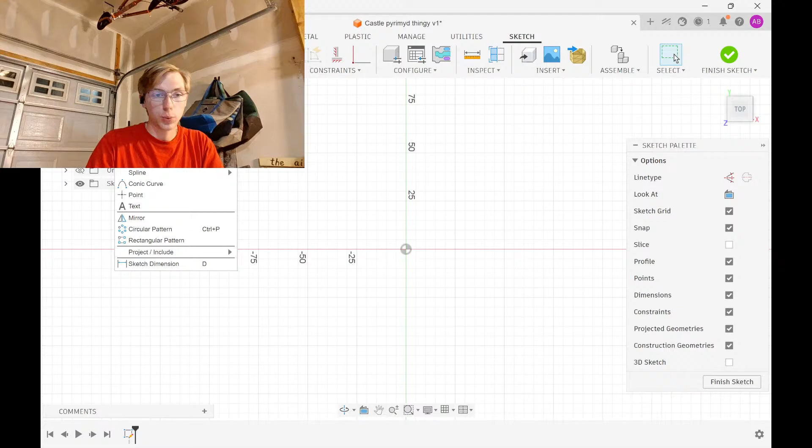So let us go back into Fusion. We have a blank slate, and the first thing I'm going to do is make the triangle shape like this, just a simple triangle, and all these angles are going to be the same, which means, if I can remember math, for an equilateral triangle all the internal angles are 60 degrees. Then we will make this horizontal and set the side length. That's not an over-constrained sketch, my guy. Oh. Is it? Oh, I did the wrong one. Okay.

Then we can use some construction geometry. You can see this, correct? Yeah, great. Just had to make sure real quick. Construction geometry to find the center point right there. Now go up to the top. That's construction. Then we will add another line of construction geometry along this axis at the center to there.

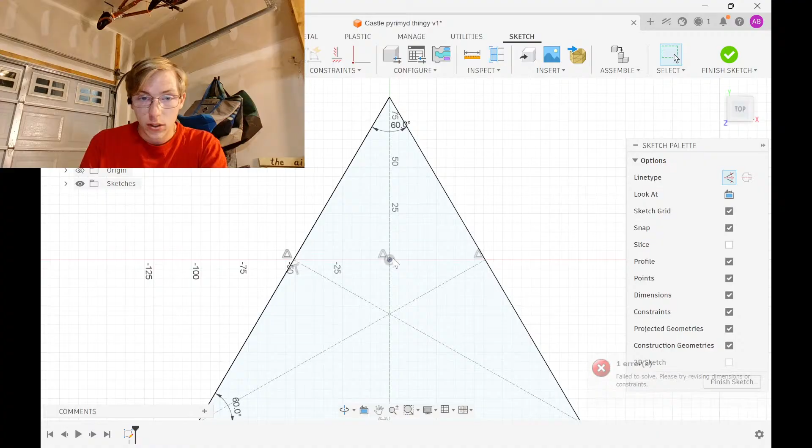And I messed it up. So, coincidence, this point to here. And then finally, one third line of construction geometry right there. Now this point right here, we can constrain, actually we will do midpoint, this line right here, and then this line right there. Oh, I midpointed that line, my bad. We want to coincidence this line here, coincidence this line here, and bam, now the circle is centered.

And we can, that's our bottom, right? So we can extrude this to be 2 millimeters. And that's our bottom plate. Then we want a hole in it. Circle, go back to the web, and go to rocketery.com. We go to their component section, we go motor mount tubes, and we want their 29 millimeter 6-inch tubes.

Of course, it doesn't actually give me the dimension. Quite annoying. Apogee. Apogee will give me the exact dimensions. So, the 29 millimeter motor mount tubes from Rock Precision. I think these are the ones from Rock Precision. Manufactured by Apogee. Okay, we can always change the dimensions later. Again, this is just a test. But the inner diameter is going to be 29 millimeters, and the outer diameter is going to be 30.7 millimeters.

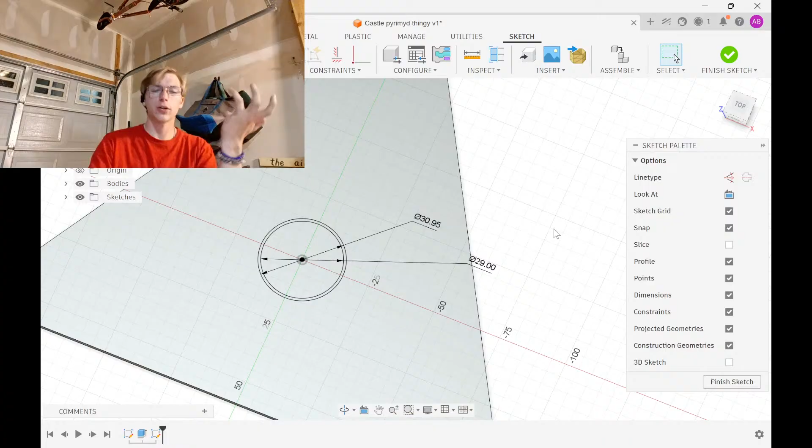And the reason I do equations is so that later I can go back and change this number if I get a different tube or something, and then the tolerance will still be there instead of me having to calculate what the new number should be each time. Now I can, bada bing, bada boom, extrude this -2, and we have ourselves a hole. And then I can... I'm not thinking ahead.

Okay, so when you do laser cutting, you have to use a DXF file. You export a DXF file, and then you import a DXF file into the laser cutter app. What I just did is I made a solid, but that solid has 2 DXFs because DXFs are made from sketches. So what I really need to do is make the whole plate in one sketch. So I'm gonna go back into this sketch, and I'm gonna make those same two circles, but I'm gonna make sure they're in the same sketch.

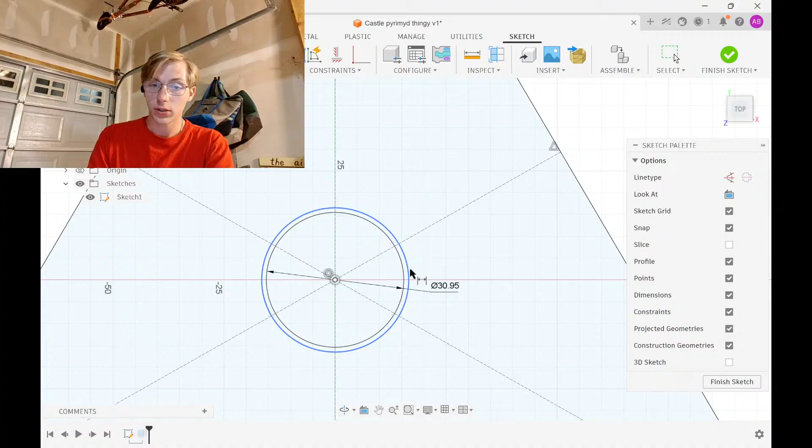So this was gonna be 30.7 plus 0.25 millimeters, right? And then this one was just straight up 29 mil. So now I can go back in here and I can deselect these two, and then we have the same shape, but now it's one DXF file. So I can just go in here, right click this, export as DXF, and then we'll have what we need to laser cut.

Let me read the chat real quick. I would make it taller, except that I haven't simmed anything taller, and I already know this flies straight, so I'm going to stick with something that flies right. At least something that is supposedly flying straight.

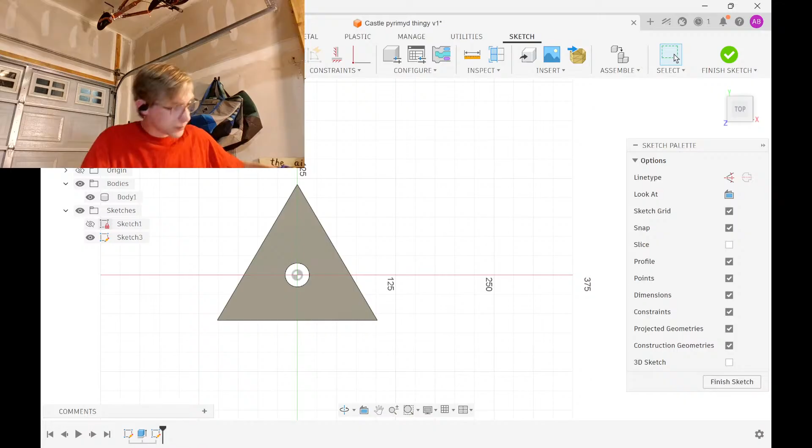A square that is 6 by 6. No, it's not a square that's 6 by 6. Wait. Yeah. Alright, so we'll start with a... That is not the right button. Cancel. We'll start with a square that is 6 inches by 6 inches. And then we will center it.

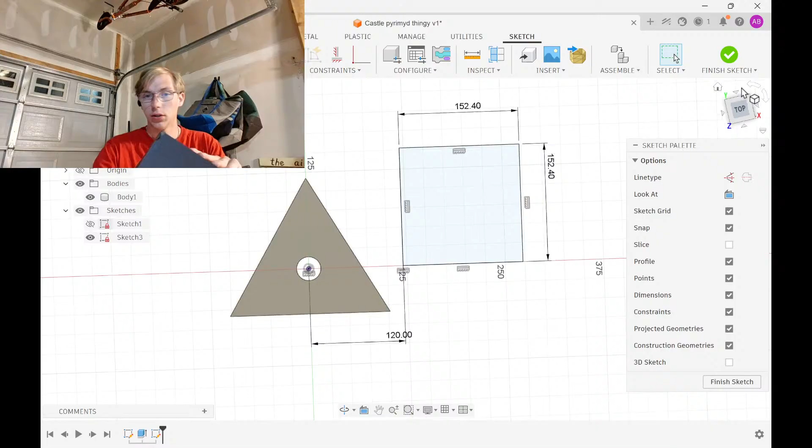Actually, bada boom, and then do 120, just so it's close. Now, the pattern is on one side, so if you turn it horizontally... that didn't. But if we turn it horizontally, it appears as though it goes out at the top to the point, and then it goes in by 1.2 inches, but for clarity's sake, we'll just go with 1 inch.

So I'm just gonna model up the shape real quick. How many cutouts is there? There is 1, 2, 3 and a half. Okay. Need to coincide that there. Then all of these, actually, we'll just use a line of construction geometry. This is construction geometry. This needs to be horizontal, and it needs to be 1 inch away from this. Now we can coincide all of these points onto the line.

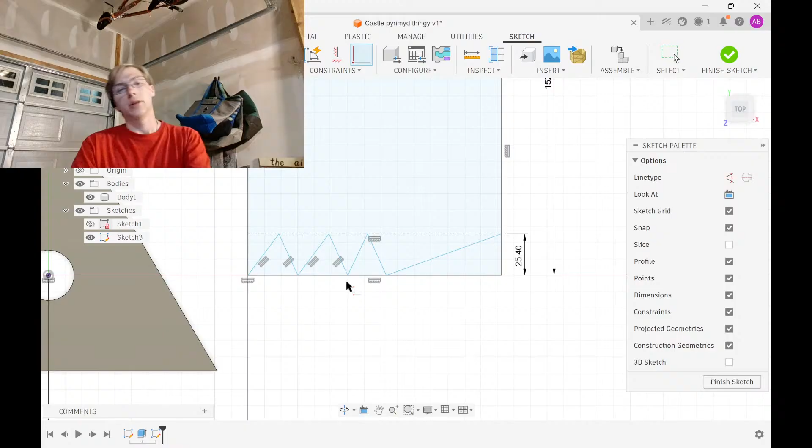That actually goes there. Now we have to make them all equally spaced, so we take 6 inches and we want 1, 2, 3 and a half cutouts. So my brain is not mathing, but it should look something similar to that. If we want 1, 2, 3 full cutouts and a half. I don't know why they have that half in there. I assume it's for a reason, but

we need obviously 3 divided by 2. 6 divided by 3 is 2, or 6 divided by 2 is 3. 6 divided by 3 is 2. They're all correct. I'm just rambling on.

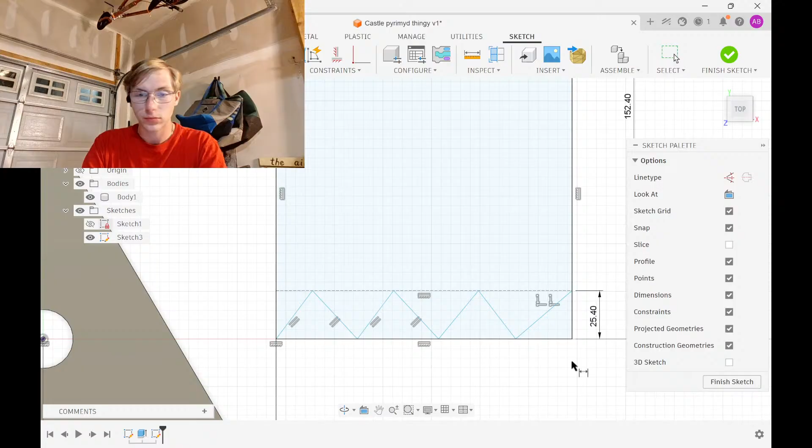You can see that this diamond is the same shape as these 3. So these are 3 full diamonds and a half diamond. Which means if we do a dimension here and here, dimension between here and here, do this as 1 inch. This is 1 inch. Here and here is 1 inch. Here and here is 1 inch. Here.

No. Those should not be parallel. Those should not be parallel. Dimension, 1 inch. Dimension between, 1 inch. Nope, that's not correct. So let's go 0.8 inch. Honestly, I'm just gonna eyeball it. 0.8 inch. Copy that.

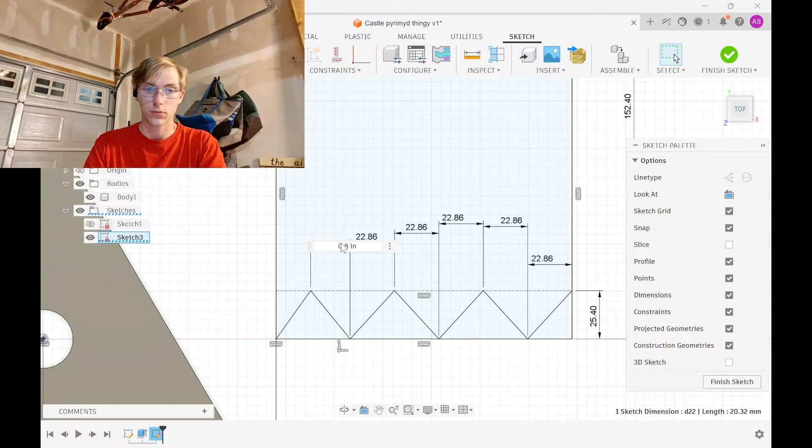That doesn't look bad, but I'm not convinced that looks proper. So let's go 0.9 inches and try 0.9 just as a nice middle ground. That's a bit too much. So we will try 0.85.

Alright, that looks about right, I think. Yeah, that looks about proper. So now we can go and just extrude this as 2 millimeters, and we've got that edge. Now I'd say we should probably break this open because we have one. So let's go ahead and crack it and decipher the insides.

Let me read chat real quick.

Alright, so first I'm just going to try to rip it open. Actually, I have a razor blade. So it appears as though it's almost... No, they waxed it. Okay. So they glued it. I don't know. The only thing I don't know is how they hold up these. I'm trying to think through how you build it, and logic states that it wouldn't really be very structurally sound, you know? Like, when you're building it, I feel like this would be very difficult to build. Which isn't necessarily a bad thing, but... Oh, what have I done? I'm just not cutting it out of the way.

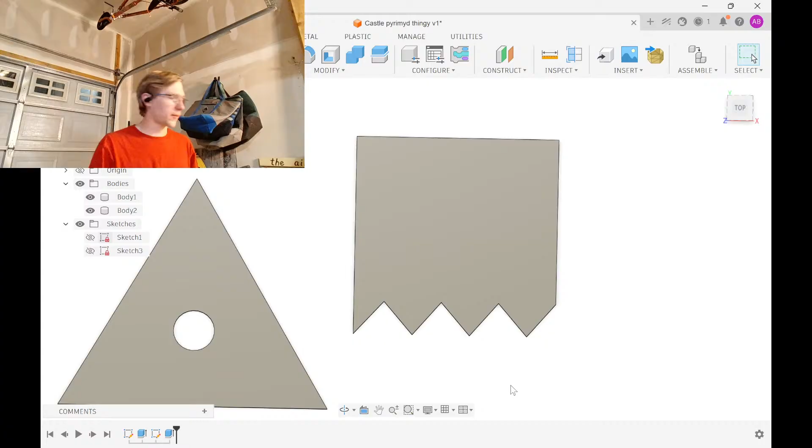Well, if you want it, like I said, it'll probably be... This one should honestly be really easy to test fly. Because once I laser cut it tonight, honestly, for a single-use rocket, I could just 3D print a motor tube and then build it, fly it in the next few days, and then launch the kit. Probably sometime by the end of the week, ideally.

24-hour kit build, meaning I have 24 hours from a half hour ago to fully design and launch a kit. That would be interesting, to say the least.

I've thought about using tabs, because I could theoretically use tabs on the sides to help hold it in place, but I feel like that would almost disturb the look of the rocket, you know? I don't know. But yeah, let's finish. So we've got this one. I think I will probably have to use 3D printed launch lugs, because I don't know what else I would use.

What else would I use? Let me know in the chat what else you think I should use. I could get really thin tubes, I guess, but I also just have a 3D printer, and that would be much faster. Cheaper per kit, theoretically. So let me know if you guys think it would be okay to use just a 3D printed launch lug, because I think that would actually work really well.

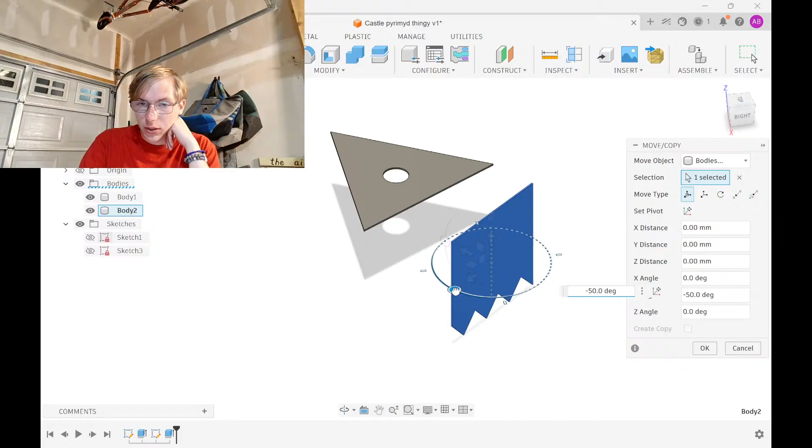So I have to figure out how I'm going to model the side with the hole. I guess we try to assemble this, so we'll move this, and what it's going to have to do is we'll have to turn it 90 degrees this way, rotate it 60 degrees this way. Actually, no, 45? No. 55. Oh, 60. Yeah, 60 makes sense, obviously. Silly me. And then this also needs to be rotated 45 degrees. And then, before I rotate it,

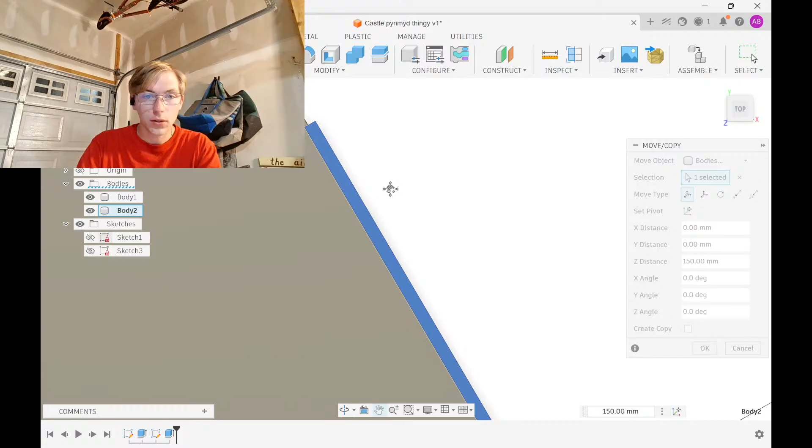well, dagnabbit. Move this. We're going to pop it up 90 degrees, pop it around 60 degrees, and then pop it this. We'll get it in position first. Is that perfect off the gate? No, it's not. Okay. We'll move it back a bit. 0.5. 0.4? No. 190. No. 150.

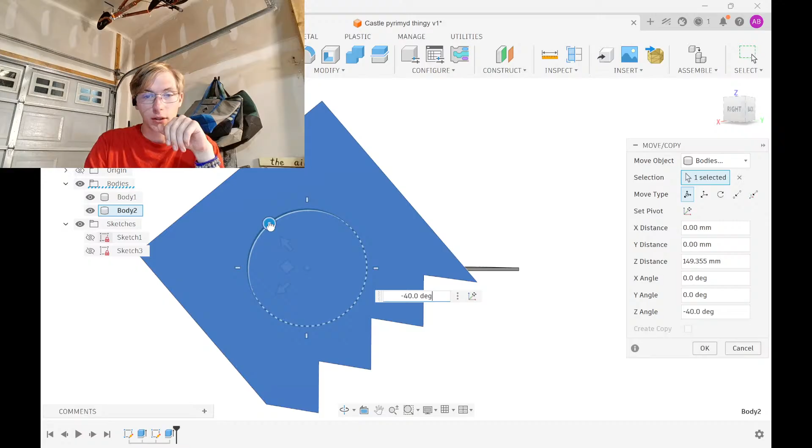It was 149. No, 0.35. Okay, perfect number. 149.355. Okay, now we will rotate it 45 degrees and move it. Now it's good. Now we will move it again with the correct orientation over slightly and then down a bit.

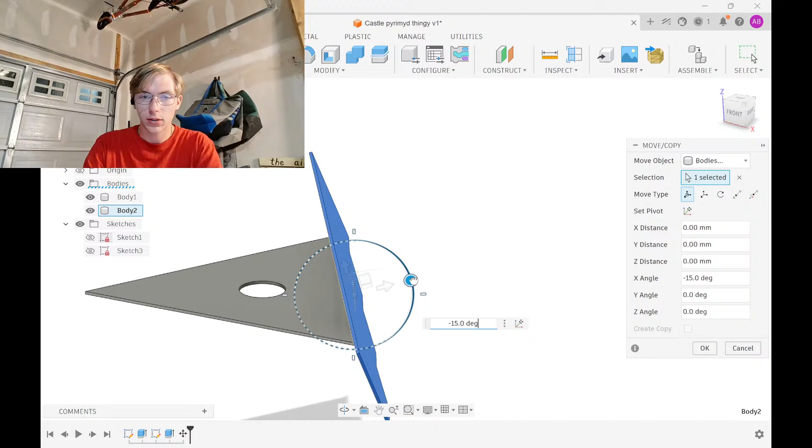Not that much. I don't know how they did this. Like, I know how it's done, obviously, but I don't know how it's done, if that makes any sense at all. No. Because they canted it in slightly. I don't know what degree, though. It is at the perfect halfway mark, so maybe I measured wrong. I guess that's possible.

Is it actually? No. Okay, so the triangle, it's slightly bigger, it appears. Down. Right? Negative. Then we need to move it over slightly. Slightly more. That looks about good. Now I have to figure out how they did the cant.

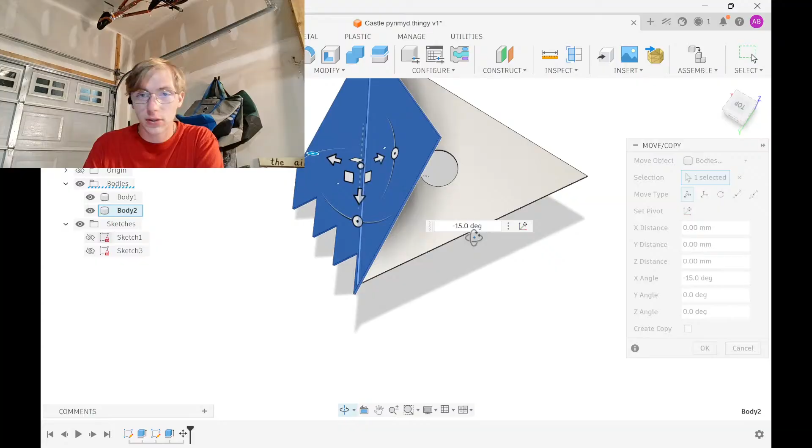The actual tipping inside, because it needs to be tipped in enough that it reaches the center, so that when I copy it around, there's 3, obviously. Okay, I think that's right. So now that needs to be moved out. There we go. Try that. So now when we copy this in a circle around here, we get the shape. Perfect. Absolutely perfect. That is exactly what it's like. Great. Now, like I said, we only need to do the hole.

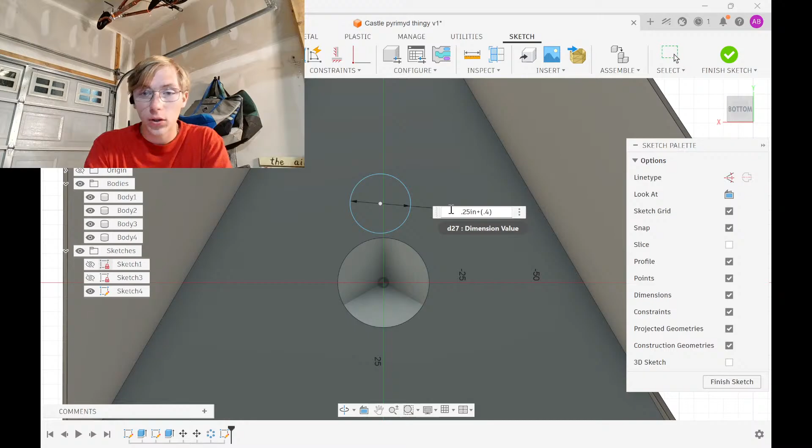How do I model the hole? That's the question now. Because I can cut it through. Obviously, that's easy. If I just go circle, and then I do circle here, get a 1/4 inch hole, so 0.25 inch plus a tolerance. We want this to be really loose, so let's give it a tolerance of 0.4. And then we will center it on this, move it down slightly, so we'll put that 22 millimeters up. And then we can simply just extrude this all the way through it. That's what I need to do, but in another spot, so hold on.

We want this. I forgot they don't let you do negative numbers. That's the only annoying thing about Fusion. Well, actually, the most annoying thing about Fusion is just... Actually, no. Yeah, that's pretty much the only annoying thing about Fusion I can think of. They don't let you use negative numbers in your things.

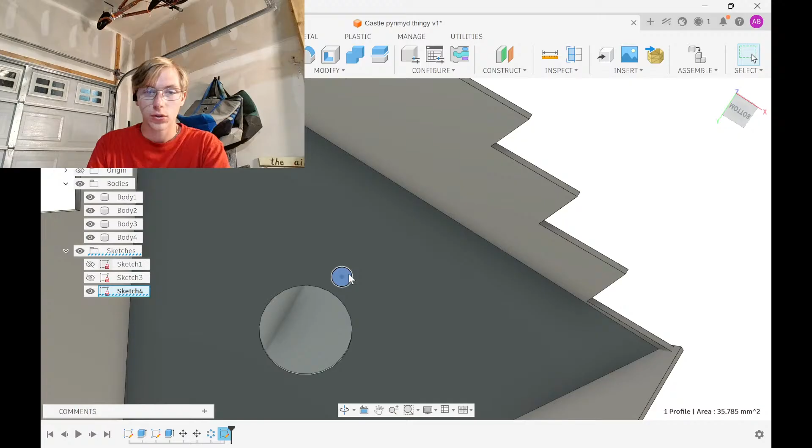Oh. Why is it... ain't doing that. Back on the sketch. Extrude. There we go. Oh, I know what I can do. I can go back into the first sketch and just put the hole right there. With those same dimensions, I can do 0.25 inch plus 0.4 millimeters, and then we can set it to be 22 millimeters above. So that fixes the first sketch. That will make the triangle at the bottom work properly.

But then this, I need this shape. I don't know how I can model this shape flat on the thing because it gets extruded sideways. So unless I can take this sketch, I can take this surface and I can extract a DXF. I guess I could create sketch.

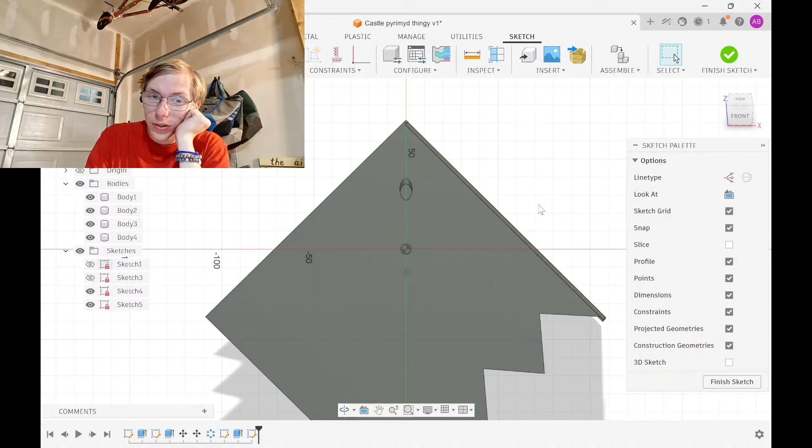No, that wouldn't work, because then the hole wouldn't be this shape. It would be flat. But that's nothing you couldn't fix with sanding. And this is 2 millimeters, so it's already pretty thin enough. So that would work. Yeah, I know. Yeah, definitely. Like I said, I'll probably have it done in just a few days, hopefully, so that it's orderable.

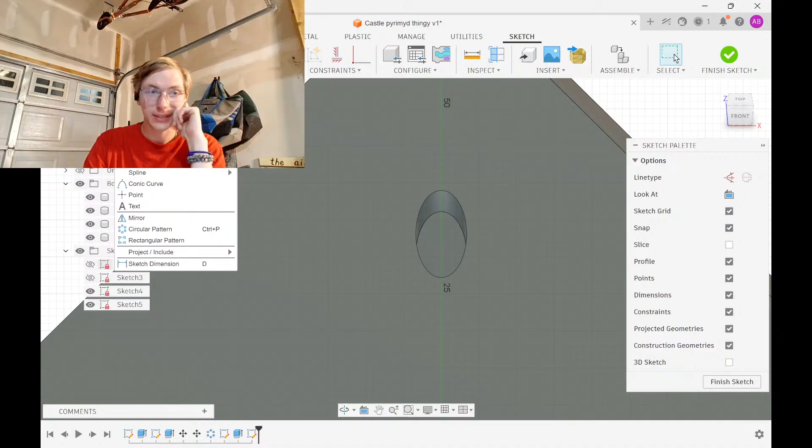I guess I can go back into this sketch. I can probably make an oval that's close enough to this that it won't matter, an ellipse. Circle. Here. There? Yeah, that's the right ellipse. Perfect. So then we just turn off these other bodies so that I can actually get a good model, and then we'll go line here, here, to there, to there, there, there, there.

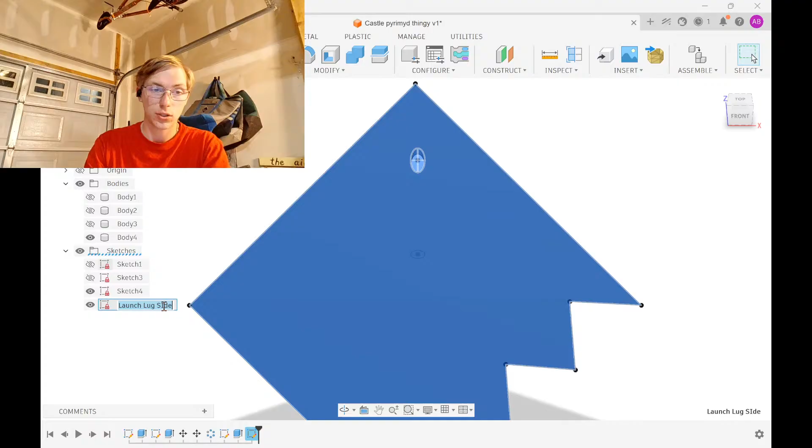We will name this sketch to be the launch lug side sketch. I can spell. Well, I can spell fine, but this one will be the main side, and this will be the base. And then what was this? This was an extra sketch that I don't need. Perfection. Back here. This is actually now in the wrong spot, so I need to go back and coincident that to right there. There we go. Now all of those are defined, and we turn the bodies back on.

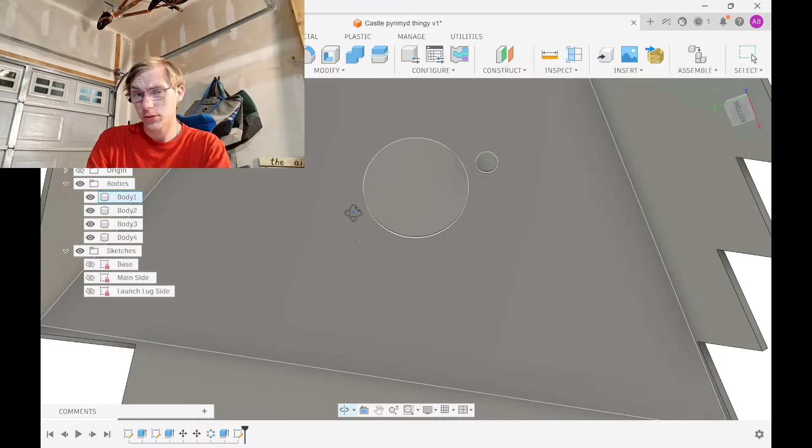We have the shape. Again, we have to figure out the solution to do the ejection part. So what do we think for that? What do we think for the actual, like, ejecting of the motor? Because I don't think it's a good idea to just let all the exhaust gases of this go directly back into here. With this.

So now we turn this rocket into, instead of copying his design, obviously, because I don't want to copy his design, we turn it into something new. So, back to Fusion. Thank you, E.S. Snyder 5. That was useful. I did not know. I've done a ton of searching and I could not figure out who the actual creator of those was. And I remember somebody telling me that he went out of business, but that's good to know that he has files online. So now we just modify it. And I do actually really like the idea of having it have an ejection charge.

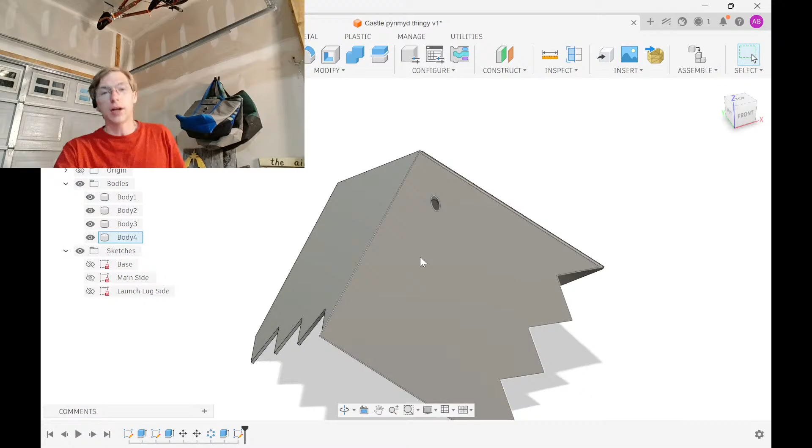Let's see. Let's go back to his website. That's not the right thing. Here. Rocket launcher, rocket clubs. I'm just getting started with 3D, so it's appreciated. Back here. New 3D rockets. Free stuff. What is this? Before going to free stuff, you must read and accept the following conditions of use. Criminal liability. Model rockets are not toys. Yeah. Copyright infringement. Violation launch. Accept. Interesting. Okay. Well, so that means I obviously cannot use his design.

So we change it. I do still want to do a pyramid rocket because I like the idea. So, what shall we turn this into? Does chat have any ideas specifically? Well, I can't directly copy his design because that is copyright infringement. And also, I don't like copying designs. The reason I was trying to make it initially is because I was under the impression that he was out of business and therefore no one could get his kits. Which is true. He doesn't sell them. He doesn't sell the files. He has the files online for his shop. But if you don't have a laser cutter, you still can't make one out of wood. So there's that.

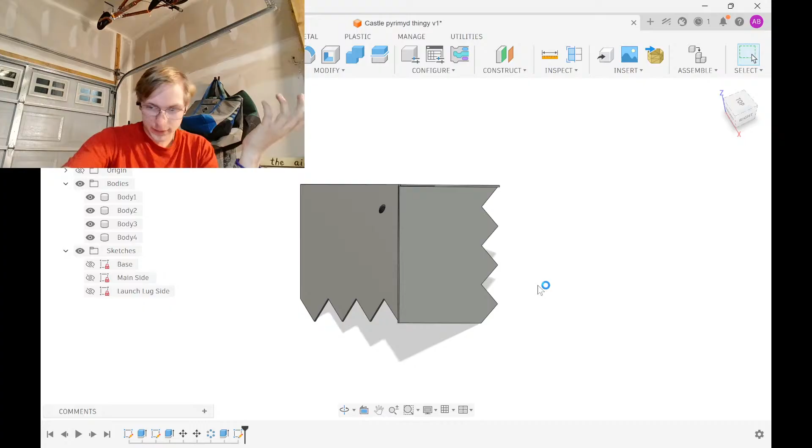But I'm not gonna go and just directly copy his design, so we do need to change it a bit. I think to make it a little more lightweight, and also we want it to be lighter weight because this is going to be made out of wood, so it's going to be a little bit heavier.

And actually, this is small enough. I think if I made it out of wood, I could swap it down to an 18mm engine. And I would like to be able to make this flyable on Estes engines, which means I could go with 24mm. Estes has 24mm E's, right? Am I going insane, or they have 24mm E's, right? Yeah, D's and E's. Okay.

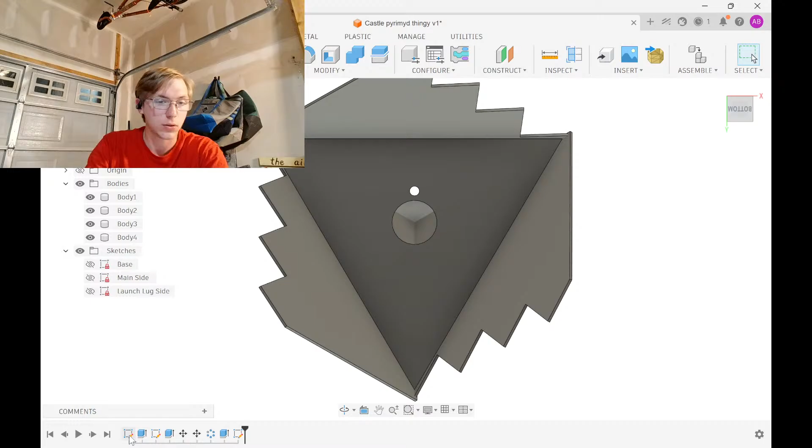So we'll make this down to a 24mm engine mount. Not the right file. This one, yeah. So this will be 24 millimeters, and this one will be 25.7, we'll just call it there. And then this one will be 18 millimeters above. Actually, we'll make it 19.

I've had many people at the club tell me that they would like a rocket like this again because they haven't had one in forever. Because, again, you can either make it yourself, but there's no way to buy the kit. So I definitely want to make something.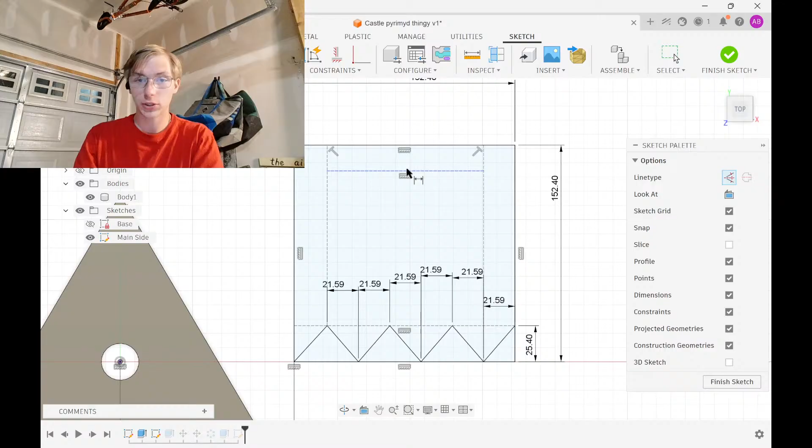And I think let's go with some cutout design, just like continuing the pattern. I don't want to structurally compromise too much, so we'll add some guidelines. Here to here, be off limits. Here to here, and then the same dimension there to there, obviously horizontal, and the dimension of this is 0.85, so dimension this to this. That gives us this square of space to work with.

And I think we should either accentuate the triangle shapes or the square shapes. This is a triangle rocket though, so we should accentuate the triangles. So let's go with triangle in each corner, because why not? I'll define those in a second, so they're better.

And then I need to make them non construction lines. This should be vertical, this one will be vertical, this will be vertical, and this will be vertical, so that we have a right triangle type situation going on. This will be 2 mil from here, this will be 2 mil, this one will be 2 mil, this one will be 2 mil.

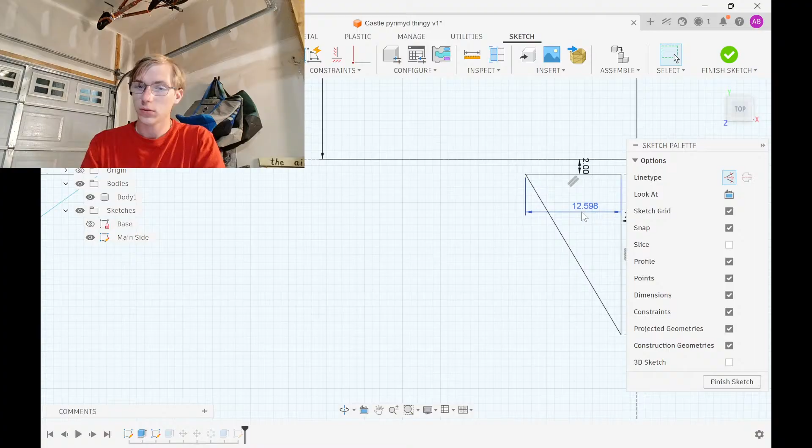And for the width, let's make this 0.85 inch, because that's the same number as the other ones, as the bottom pieces that I made. Dimension this to be that. Yep, dimension this, and dimension that. Okay, that adds 2 triangles. Now we just have to copy and paste.

Over there. Move it right there-ish. And oh, that's not the right button. We want that to be horizontal. And then we will constrain this to be 5, actually yeah, 5 mil is better. It's not 4 degrees, silly computer.

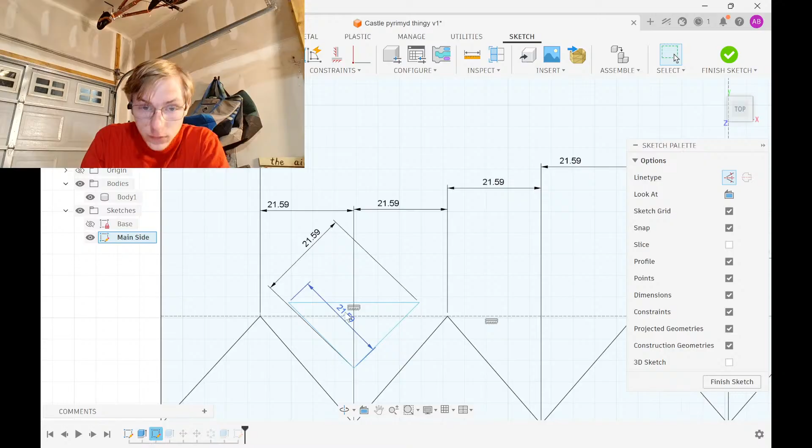That's horizontal. I'll make this parallel with that. Happy computer? That makes more sense, I guess. Oh, that would be why it didn't like those dimensions. Fair.

Alright, dimension this to here as 5 mil, this to here as, again, 5 mil. I don't like how close that is, let's make it 10 mil. Yeah, that's pretty good. So then we'll just copy and paste this over here, a few more times. Be 5 millimeters over, good enough.

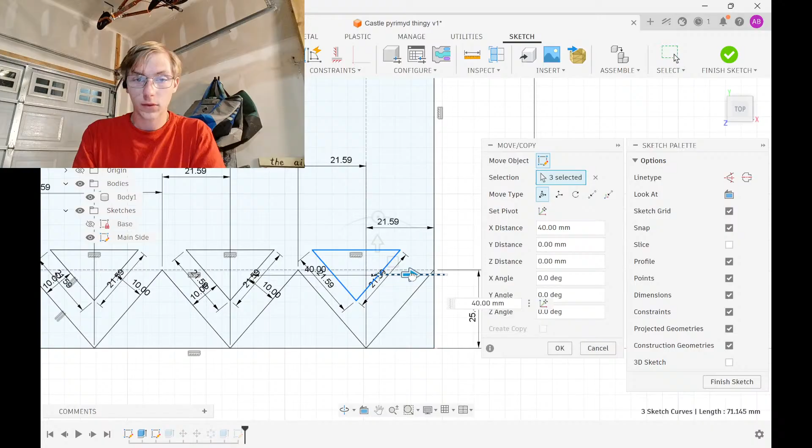And then again, dimension it to be 10 mil from there, and 10 mil from there. And then one last time, we can copy and paste it there, which we will then again constrain to be 10 by 10. Oh, see, that goes outside the line though. So, that I made at least.

Actually, since that goes to the top, we could set this to be 2 inches, and this one to be 2 inches, as like the big top square piece, and then we won't make anything go on that side, but we make stuff go on this side. So we can just fully delete this line then, and then constrain this to this. Let me know if you guys are getting lost, because I do want to teach you some things. And then you actually will delete this triangle completely, because I don't think it fits now.

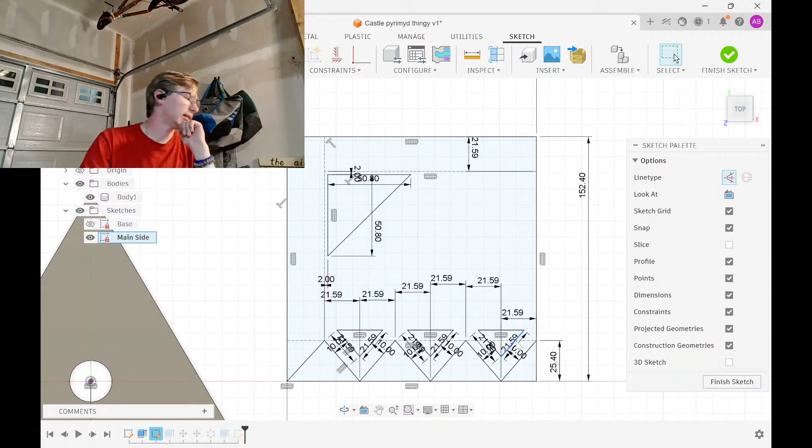Although, in that case, we kind of need it to be diamond shaped on both sides. I don't know if that will work, though. If we add another diamond shape there... What do you guys think? Have you guys said anything?

It's taller. On the website, it does say - well, I guess that's not actually how copyright works, so I'm going to ignore that part, because it was incorrect. I guess he was referring to upscaling, not changing the actual dimension, but I can make it a bit taller.

I wonder how it would fly if I just added another side to it, if that makes any sense. There's already - this one's kind of destroyed now, but there's this side. So what if I just add those same things to that side too?

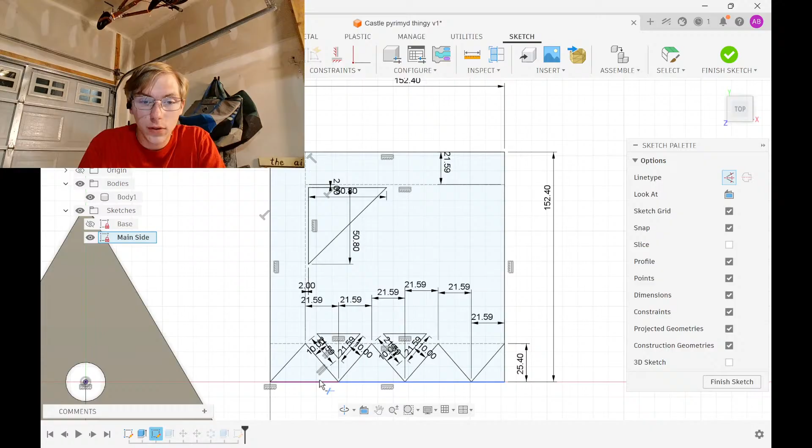Go for it. So in that case, I'll have to destroy this triangle. And I will have to delete - I'm going to actually just trim off this. Actually no, that just deconstrains everything, so I'll leave it for now. But I will copy and paste the teeth pattern that I made.

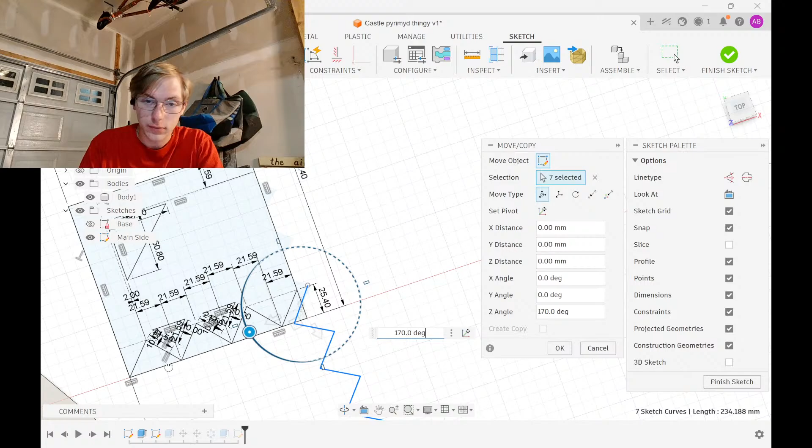We'll move it over there. We will rotate it. And we need to flip it. Can I flip it? Yeah. Flip it 180. I'm gonna actually rotate it again 180, because I shouldn't have rotated it the first time.

And then we can move this up there, in slightly. And call that good enough, and then we will just coincidence all of these things together, and then redimension it.

The only thing is, how do we connect? I think this goes here, actually. Which means this goes there. Which means you just get a square on the end. Okay, that makes so much more sense. Okay yeah, let's do that.

Alright, so the dimensions between here and here. Silly little computer. Dimensions between here and here are 0.85 - no, 0.85 inches, silly. See.

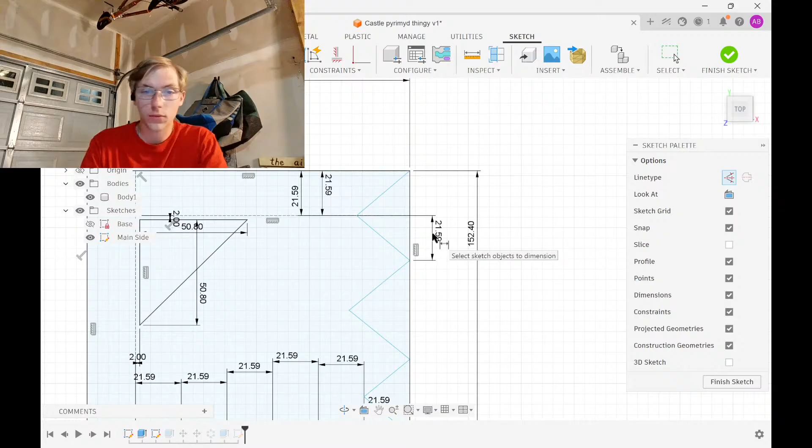I'll constrain all of these, and then - don't want to create a driven, but that should be right as long as we get the sizing down. So this is 1 inch, Control C. So now we need another line, construction line. Right, put it down there. We'll make it horizontal. Dimension this between here and here being 1 inch.

Now just constrain this to here, this to here, that to there, and it should be, right?

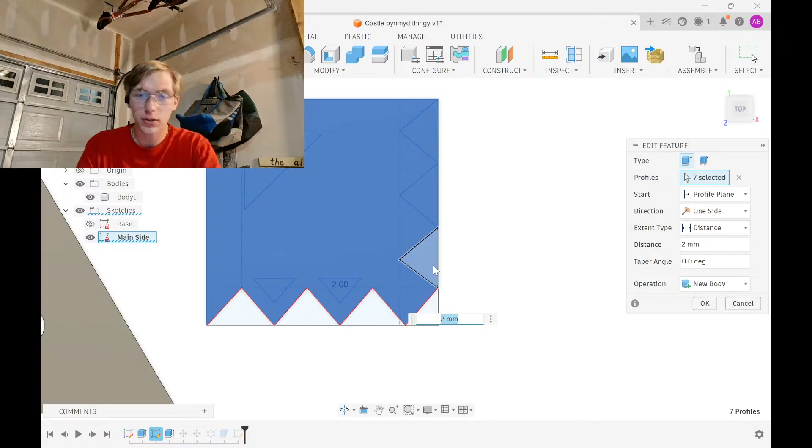Mostly, the only thing I don't like as it is now - I don't like this shape because when it gets cut out, right, we go back here and we deselect these squares, that's gonna make a really odd shape, right? Which I don't know that I like. It looks a bit weird, and I feel like that's gonna be a weak spot that might break easily.

So I vote we change the base - not that, yeah, that sketch. We change it and get rid of this bit right here. Remake these. We reconstrain these so they are indeed 1 inch. I want to - let me constrain those. To redo half the constraining.

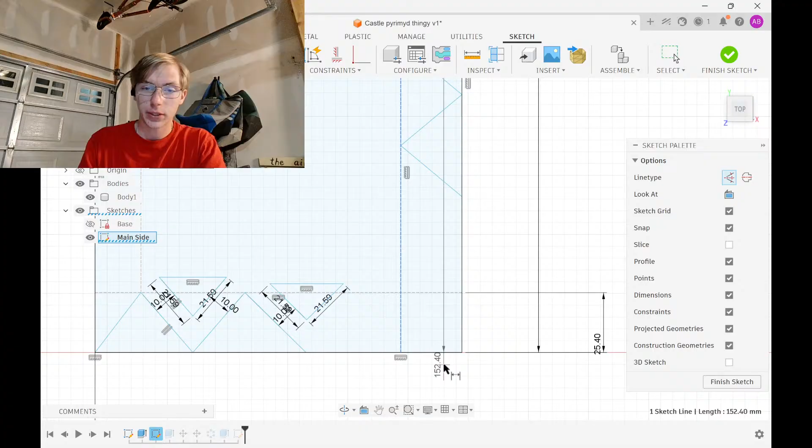Okay, this does need to be 1 inch from here. This needs to be 1 inch from here. And then this can get deleted, and this can get deleted for now. Then we can make this 1 inch. Then from here to here is 1 inch. Here to here is 1 inch. And from here to here is 1 inch.

Which leaves me with - then I do this to here is 1 inch. From here to here is 1 inch. Here is a driven apparently, and from here to here is 1 inch.

And then we do a line from here to here, which cuts off that corner, which doesn't look too bad. I feel like that looks better, I think. I don't know yet. This needs to be constrained to here by 1 inch. And this needs to be constrained to here by 1 inch.

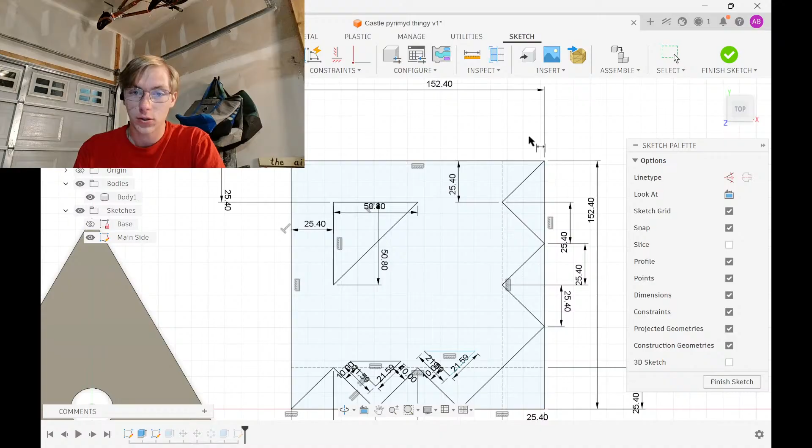That's gonna look awful weird. Yeah, that looks almost worse somehow. Definitely means more, smaller of them. So hold on.

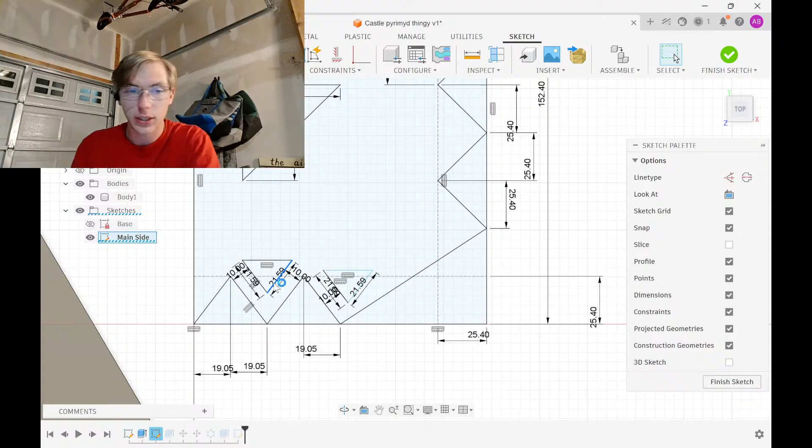Go back into the sketch. We'll make them 0.75 inches. That's a decent amount smaller. I'm gonna delete these triangles for now because they're throwing me off dimensionally and everything else. Dimensions, you...

You need to be that. You need to be that. To be that. You need to be that. And we can delete this. We can go line, add another one. To be at least 3.

Then we can go dimension between you again, is that number. Here is that number, is 0.75 inches. I guess I should be using more descriptors because I am trying to teach you guys things, which I don't know if I'm doing a very good job of. But that probably looks a lot better, I would say.

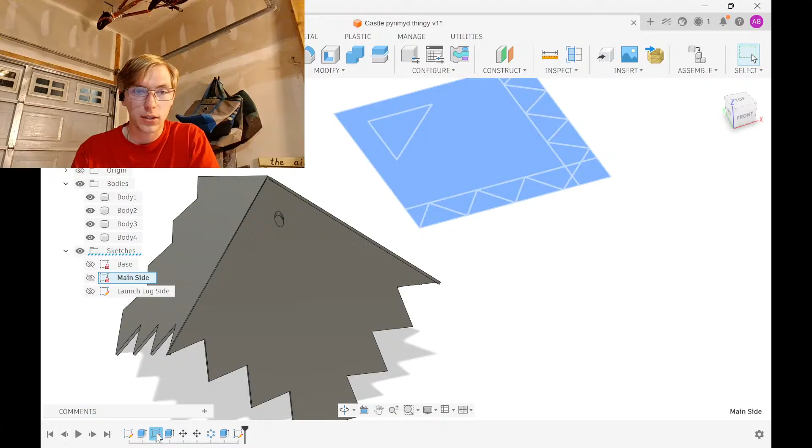This needs to be moved to this then, so that it matches. Otherwise that just looks goofy. Oh wait, I can't even do that yet. I can't even put that there because if I do, then it will cut off the hole. Yep, can't do that.

So, have to - that's not the right one. Wrong dimension. This dimension.

1.5 and okay. Try that. Okay, that doesn't look too bad actually. I kind of like the way that looks.

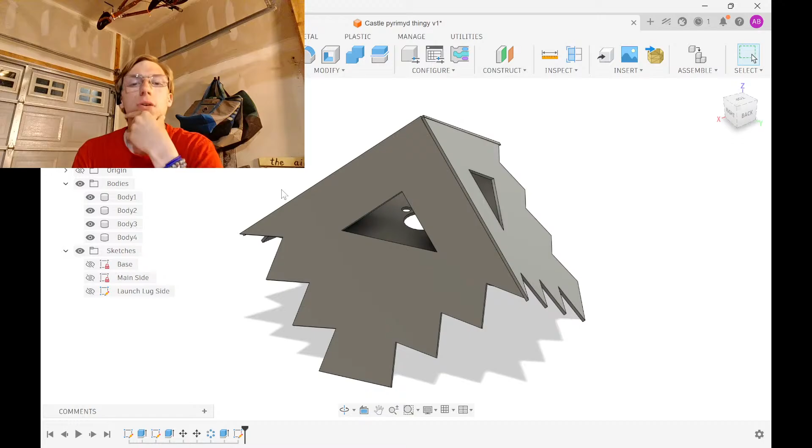I think we need another triangle, which will be higher up, that will act as a stabilizing front, and also, no, I can't do that because that defeats the whole purpose of having the vents. Unless I do, how much distance is there between?

I need an analysis, section analysis. Yeah, that works.

I was thinking I could add another triangle section, like the base, up here. That way we can make sure the tube is completely vertical. But that defeats the whole purpose of having the vents. And without those vents, then it's pointless to have...

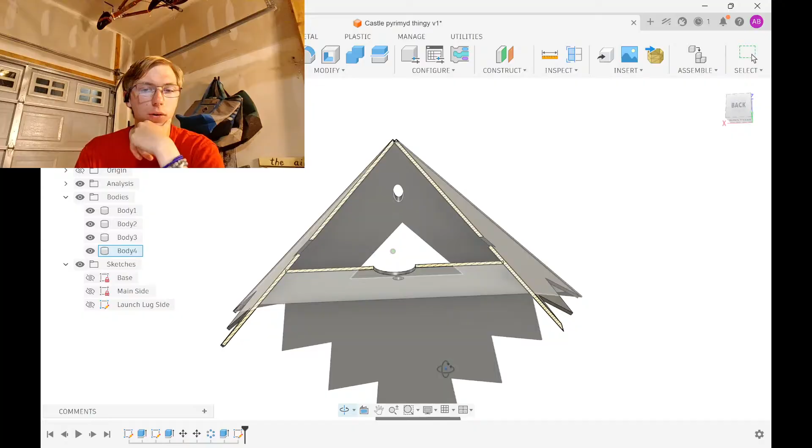Actually, no, that doesn't work. Because we don't want there to be a hole in the top. Interesting. Trying to think through what I can do. I like the base how it is now. I think that'll work pretty well.

I almost think that needs to be slightly different though. I think this needs to be 0.85 inches instead. The last one should be 0.85 inches instead of the 0.75 because it gives it a little obtuse look to it, and I don't like that. So let's try.

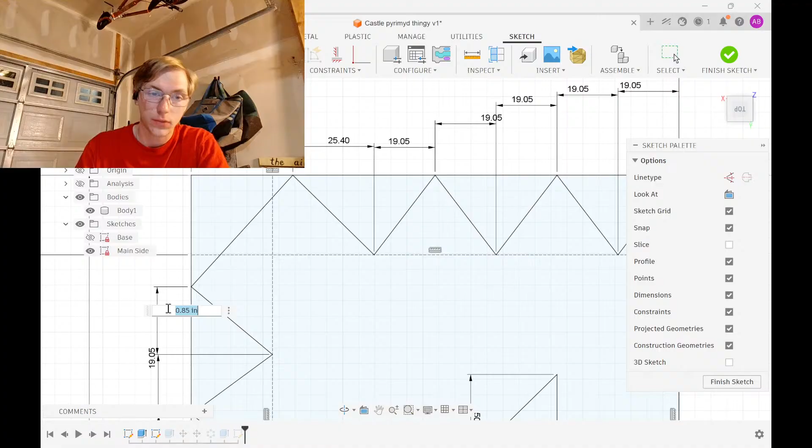That looks about right. That looks better, I think. Maybe, I don't know. I don't know, man. I work here, honestly. Like, I don't ever know.

How did he do it? Like, how did he make it so the ejection charges didn't make a giant mess?

Well, I guess download the STL file and open it up. No, I don't want to open it with that app. I don't want to open it up with SatelLite. I want to open it up with Elegoo Slicer.

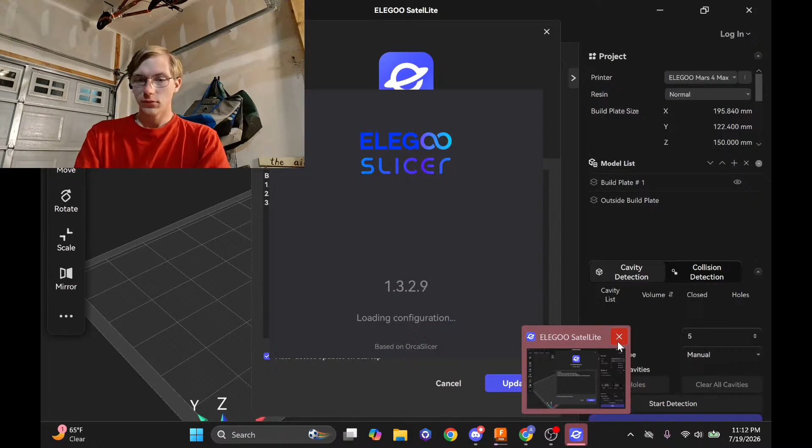Cancel. Yeah, this is fine. Okay. So, he just has a trapezoidal shape with what looks like holes in the motor tube, and then I assume that triangle is the rail guide. And then he just has a hole at the top.

That actually is geometrically pleasing, kind of. But also, pyramid is better. Cancel, cancel, cancel.

So what if we remove the triangle, so that it's solid again? That looks slightly better, I think. And then we add holes in the bottom for ejection charges, for the ejection charge to go out. Yeah, that sounds like it would.

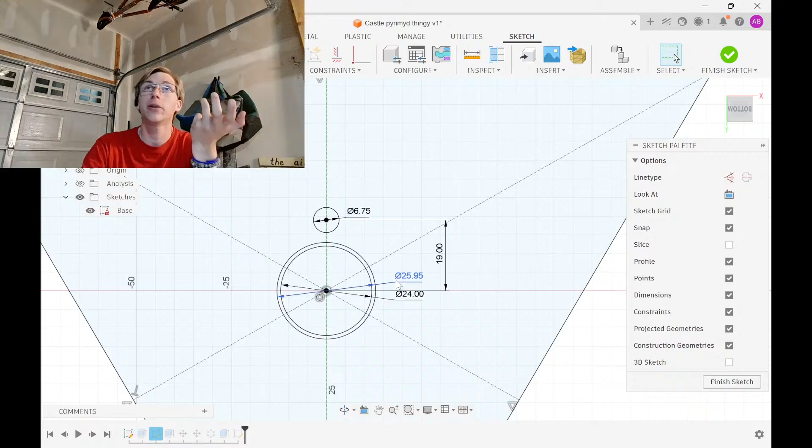Because this will be for 24mm Estes engines, which don't have that much kick as it is. So yeah, that should be fine.

There. There, and then I'll just mirror it around. So what I'm going to do is, I just made 3 lines. I'm going to make each line parallel with the outer wall of this, those 2 lines. And then I will make the base perpendicular to the construction, so it's a triangle.

Then we will set the constrained diameter to 10mm, not 20, 10mm from each edge. Yeah, that's over constrained like I thought. This will determine how big it is, so let's make it... wrong dimension. Let's make it 50 mil.

And then I will see this shape. That's a decent sized hole pocket, I think. Let me look how much it takes off when I circular pattern it. Center point is that. 3, okay. That is a decent hole.

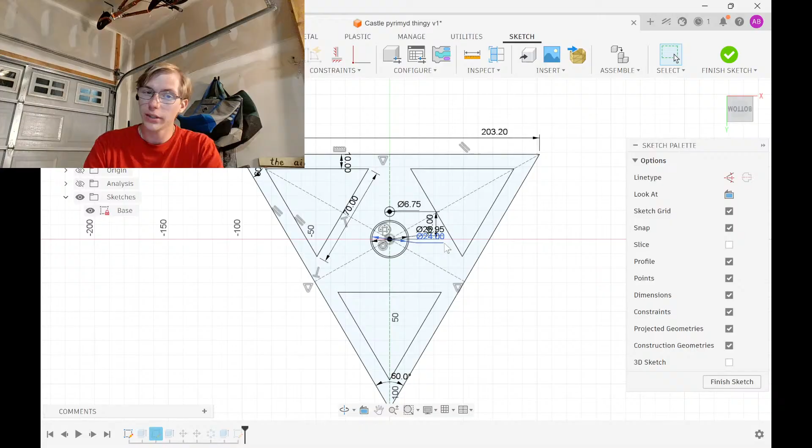Let's make it 60, see how that takes us. Let's do 70, see where that goes. That is enough, I think. We can do select these, and bada bing bada boom.

Still can't do any form of motor alignment though. That's the only thing that bugs me. I guess I could make like a bunch of stacked, but that would just add a bunch of weight, which is a bad plan, so I'm not gonna do that. This should work though.

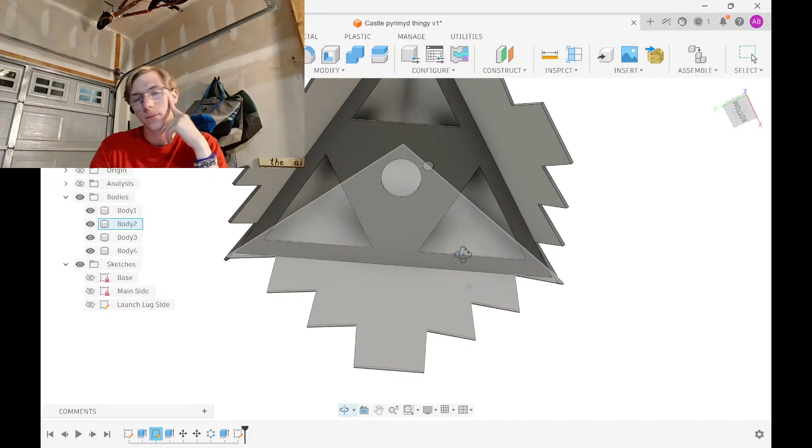The only concern I still have is how I'm going to actually get it aligned, like actually built. But that's a problem for tomorrow, Aiden.

So shall we laser cut it out, or it's already 11:15, so I could not laser cut it out. But if you guys want to stay, I could sketch up, man. I don't know if I should be doing this live.

No. Oh, is that just... What is the point? It's an app? Or like a program for making animation, I assume? Yeah, maybe? Or just drawing in general, 3D drawing? I don't know.

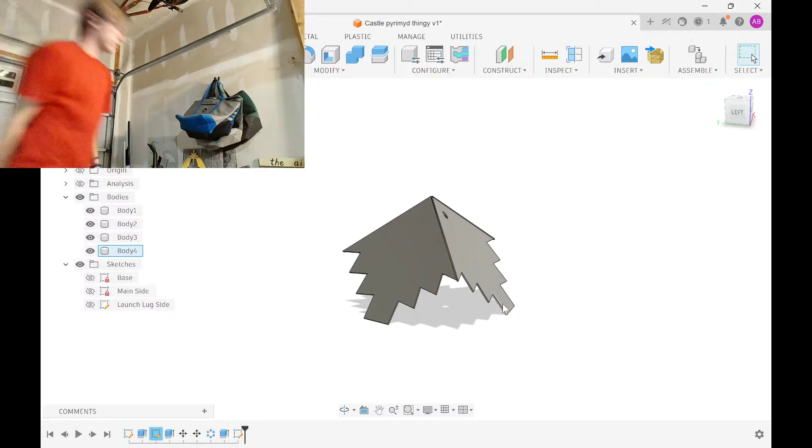Okay. Yeah, so I guess we can just cut it out. Right. Take very long. I'm gonna put that out of the way. Actually, let me set it up before I make...

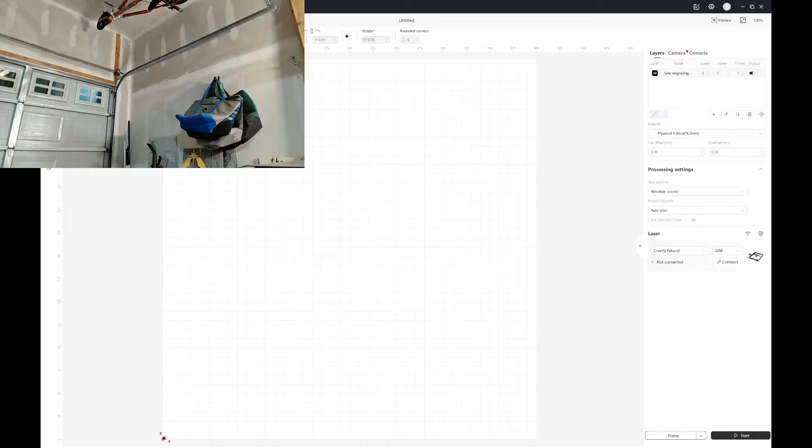Main power. Plug in the air to the laser cutter. And then power to the laser cutter. That's on. Plug in the key. Turn on for a second. Never remember if the circle is on or if the line is on.

But alright, so we gotta extract these 3 sketches. We will export these as DXFs to the base of the pyramid. We will make a new document, other files. What should we call this rocket? It doesn't have to be the final name of it, but let's go with... what should the rocket name be? For now, I'll just put it in a pyramid file.

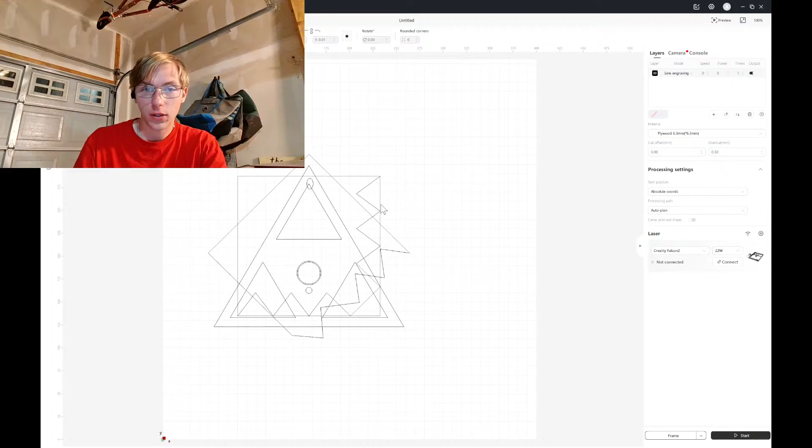Alright, so we need the side sketch, the main sketch, oh, and I forgot. We want to uncheck all of those. Yes, X override. Then in Falcon space, we're gonna import these 3, and bam, we've got our DXFs, which are very small actually, smaller than I expected them to be.

I'm going to rotate it 3 degrees just so I can fit more. But no, maybe. I'm gonna make this a different color. And cutting. This is going to be plywood 2 millimeters. This one's also going to be plywood 2 millimeters.

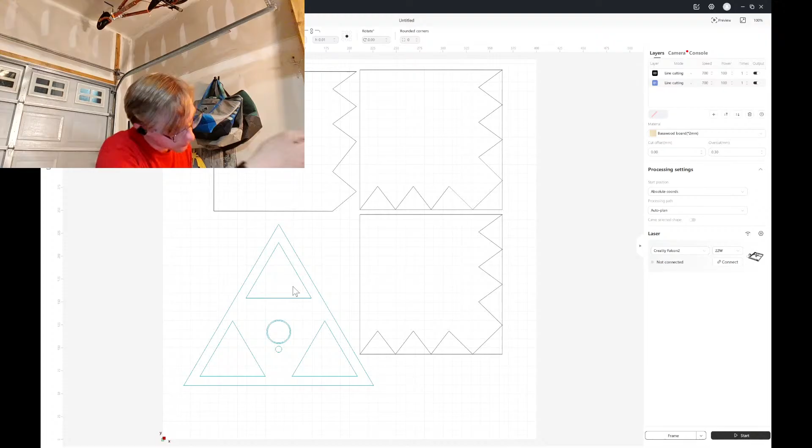Laser cutter come to life. Plugged in now. Laser cutter to life. Laser cutter, Mr. Cutter. Oh, that's so silly. I didn't turn off the emergency stop. Now it's turning on. I always forget, there's like 12 on switches you have to all flip.

Why did you bring the cat out? Nah, calm down. It's okay, buddy. It's okay. It's okay. Knox says hi. Okay. Get back inside. That wasn't a nod yet. Okay.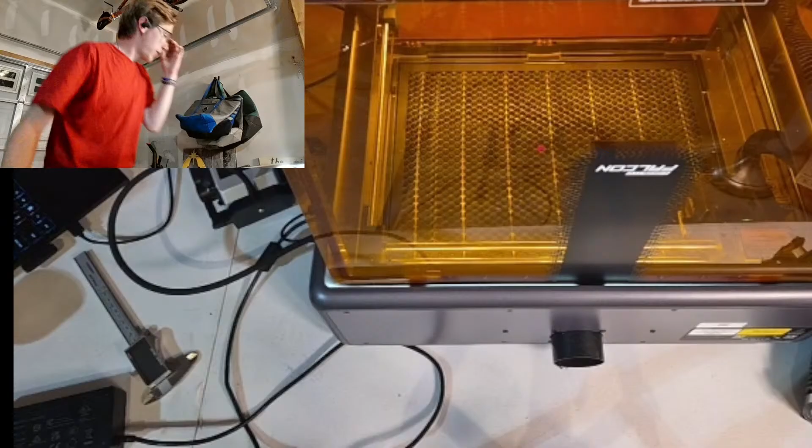Okay, laser cutter's working now. Perfection at its finest. Alright, I need a wood board. Okay, we will. Alright, I'm going to start cutting after I do some stuff. Right.

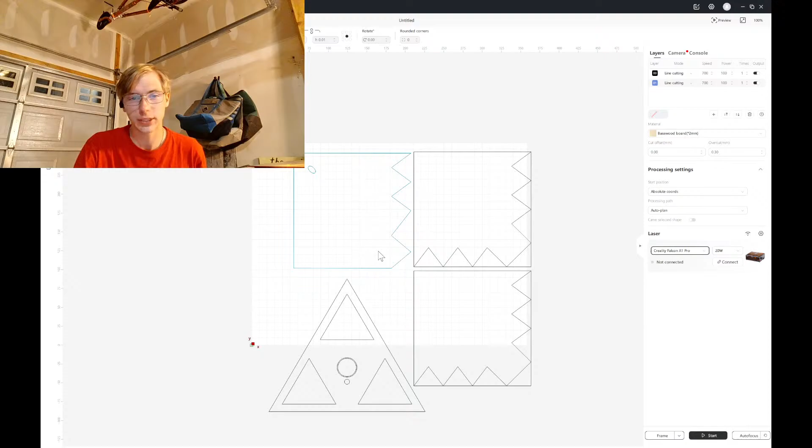No, it is a Falcon A1 Pro. That makes a lot more sense. I had it set to the wrong thing, which is why I was surprised that I could fit all of those things. But I, in fact, cannot fit all of those things, and I can only fit, looks like, 2 per board. So, yeah. Yeah, I definitely can't fit a third in there anywhere. So, that's not the right button.

Okay. So if I autofocus the laser, we connect it first, of course. Okay. Wait. Okay, now it's connected. Means I can autofocus the machine. You guys can see this, right? Oh, of course you can't. Stop it. There you go. Autofocusing. Now it's going to set the height of the tool head. Autofocus successful. It knows the height of the wood based on there's a laser sensor, the red dot. I don't know if you can see it, but it'll know. And now we're going to frame it.

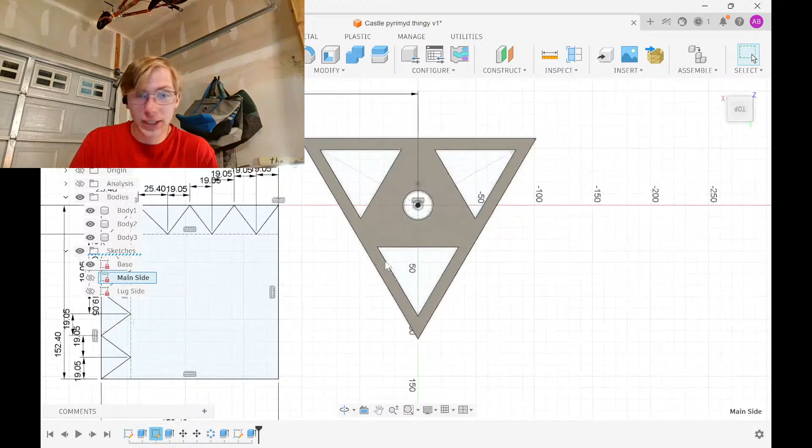The reason that's an issue is because, well, obviously it's an issue, but the reason it happened is because way back when I was making this, I didn't set it as a construction line. I set it as a real line, which is a problem, obviously, in hindsight.

To fix that, we just go main side. We will re-export the DXF, we will change the settings back to normal. We'll override it, and then we'll go back in here, we'll delete them, and then we'll import the main side again. It'll be fixed.

Now we Ctrl C, Ctrl V over here, rotate it to be, yeah, 180. And then move it down so that it is as close as possible without touching, like that. Now we gotta move the file.

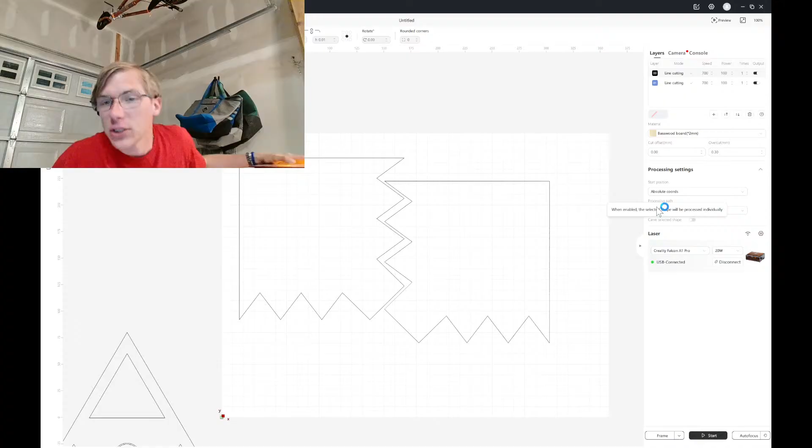Need to change the settings because it's not basswood, it's, I don't know. Yeah, we'll just change it to be 500 speed. Slow it down slightly. Frame it again. Should be right this time. Perfection.

I am actually going to move these up though. Select all. Move them up slightly. I can't go because I've got a decent amount of space in there. Okay, perfect. Oh, so actually you guys can see what's happening. And then laser cut away. Perfect, that is cutting. Now I can go back to Fusion and finish fixing. Side.

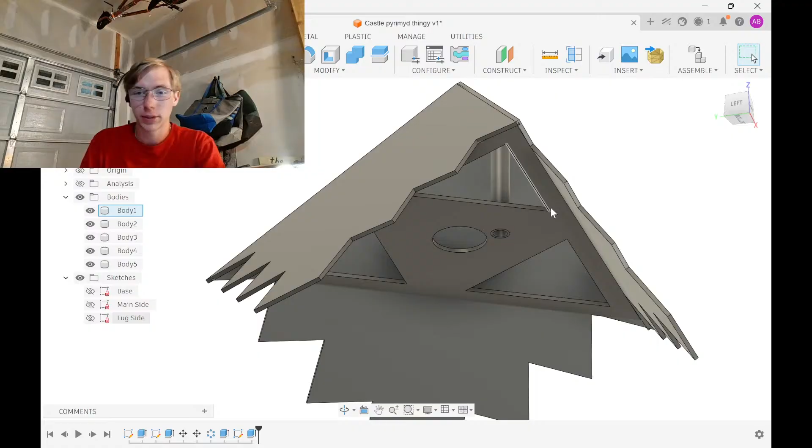I modeled the launch lug so that it's 3D printable. That means, well, not unfortunately, I just have to add tolerances. So I need another circle here. Dimension this to be 0.25 millimeters off, and then on this hole we will take it off, and on this extrude we will take it off. Then that adds tolerances there,

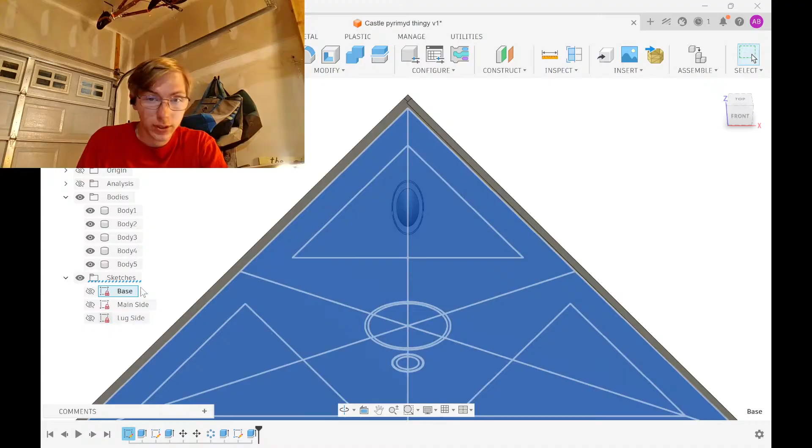meaning we need to go back into this and delete that yet again, change the hole slightly with an ellipse. Dimension it to be these new dimensions and big. Now we can actually export this DXF, lug side save, as well as the base DXF.

Save. Now we can go back into Falcon, delete this, move. We'll select all of these, we'll move them out of frame, we don't need them right now. We'll import the main and the lug. That's not correct. We don't need this one. We need lug and we need to import the base.

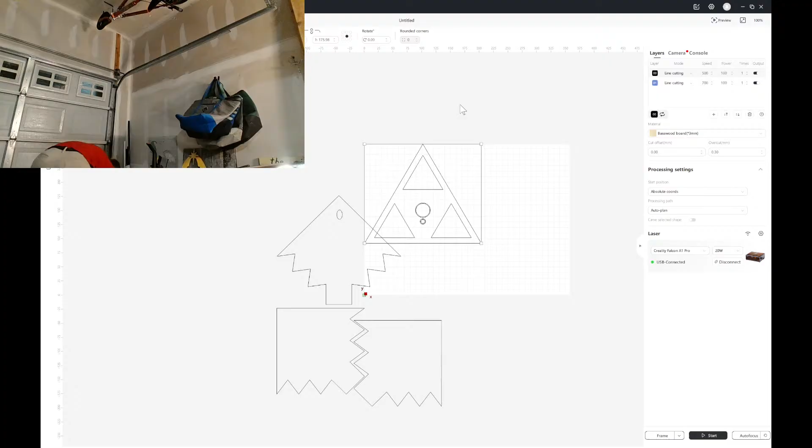Unfortunately, the base has to be printed with its own slab, so I'm just gonna put it smack dab. Actually, I'll put it off to the left as far as possible, and then I believe it's cool enough that I can probably maybe, so this is just gonna be a test one mostly. So try to snag it. That off frame.

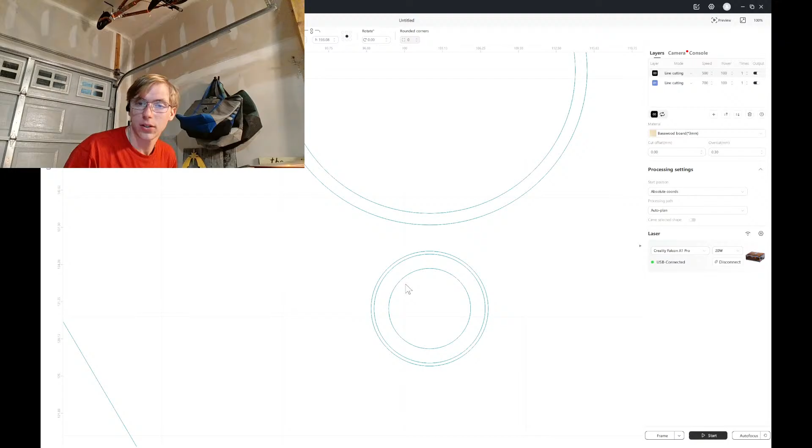Why is... Oh, that's gonna be annoying. Okay. Hold on. We'll ungroup this just for the time being. But I don't need it to cut this hole three times. I don't need to cut this hole twice. I know why it did that, and I can't fix it without starting over, so it's fine, but actually the two softwares don't really like the mesh super well sometimes, so I don't know that I can fix that at all, but it should be fine. Alright. That laser cut. Yeah.